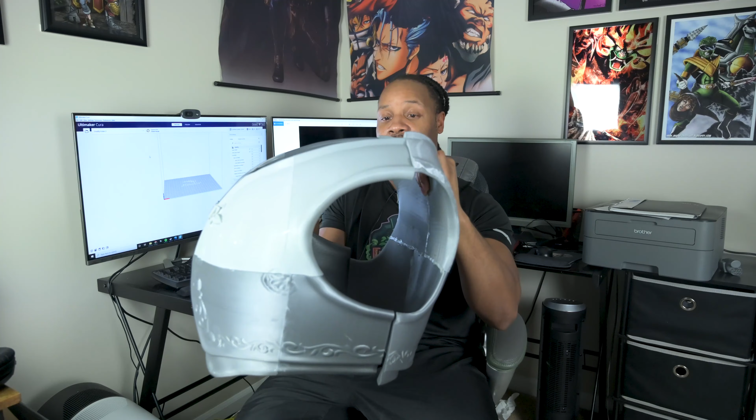The problem I experienced was the front fit, the back fit, but the front and the back do not fit together. Not sure if you can see it here, but a few of the sides just will not line up. So maybe the top two will line up and the back two will not line up, no matter what I do. That was really discouraging.

It took, I don't remember how many days, 8 days or so, or like 6 days or so for all of this to print out. All of the filament is now wasted, but nonetheless it was a great learning experience, and moving forward I will not make this mistake again.

After I made this mistake, I was frustrated, and for a few days I was like, what the hell, man, what could I have done to prevent this? So I finally learned what I need to do to prevent this.

So let me jump over to Cura and show you guys. All right, here we are in Ultimaker Cura. I use Prusa Slicer and Ultimaker Cura simply because Prusa Slicer can cut, do not get that confused with slice. I have an easy time cutting files in Prusa Slicer, whereas in Ultimaker Cura I do not have an easy time cutting files. I'll make a whole video on that later, but just know Prusa Slicer for cutting, Ultimaker Cura not so easy for cutting, at least for me.

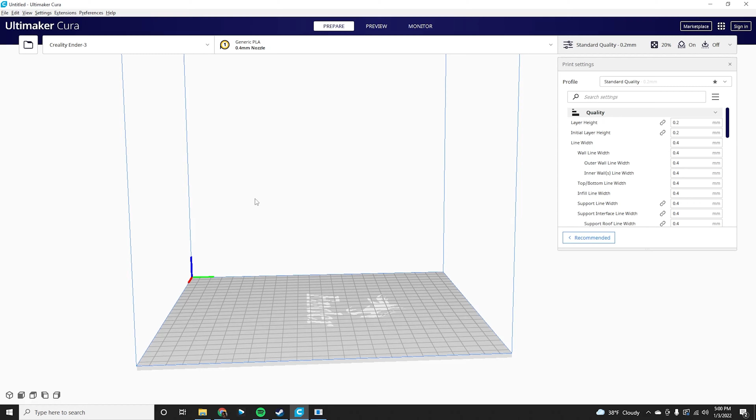Anyways, we're here in Ultimaker Cura. You guys go ahead and open it up. I'm not going to go over settings. I have mine set for my Ender 3, but I also have a CR10 here and an Ender 3 Pro profile. I'm not going over that. So let's go ahead and load in our part.

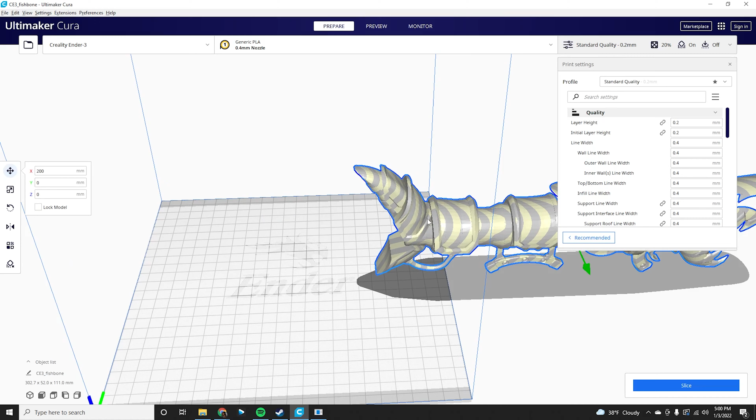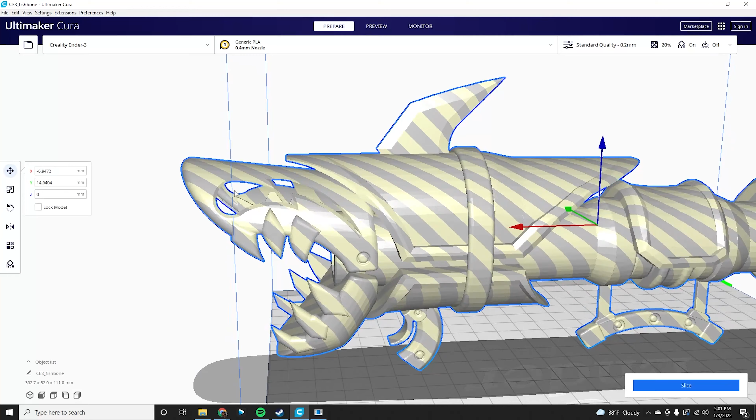I'm just going to drag and drop it. I'm going to use Jinx's gun, Fishbone, well, her rocket, and boom, here we have it. Let's drag it over here, close this off. If I can, okay, there we go. So we're not talking about scaling it or anything like that right now. We're just literally talking about making the model all combined, what you need. As you can see with Fishbone here, the eyes, let's zoom in, are missing from this model. There are no eyes built into this model.

I was like, maybe I can get the eyes, which were included in the file. So let me go ahead and drag those into the file here. I think they're underneath, there they are. So I just drag and drop, that's all I did for these. Let's go ahead and move them over to the plate. We have one eye, we have the eye detail, we have another eye detail, and we have another eye. So as you can see, we have two eye pieces, two eye details here.

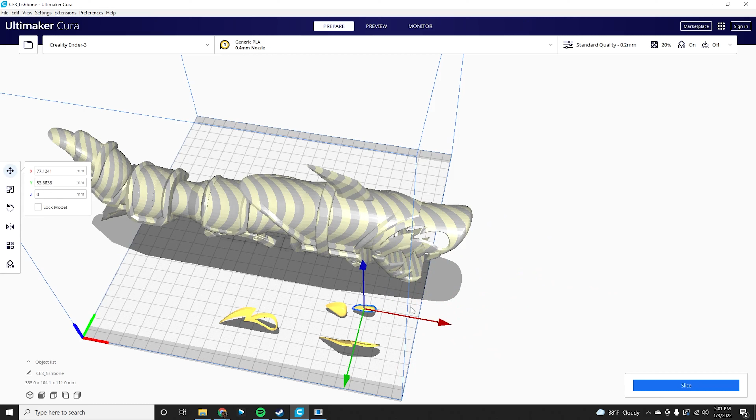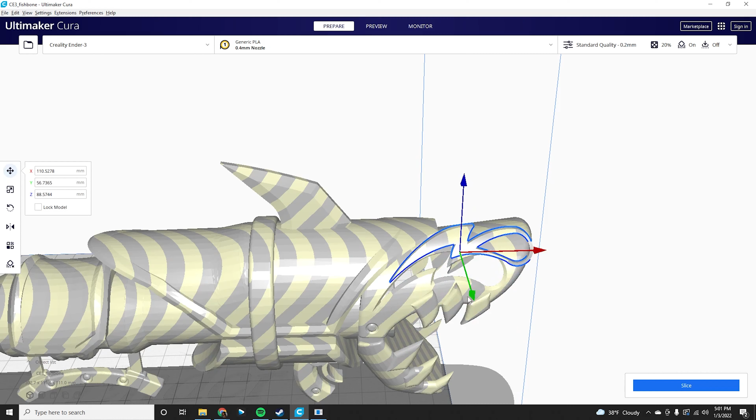What you need to do, instead of trying to line these up, it's almost impossible. First is snapping to the bed, you're going to have to try to drag, drop, match. You can use other programs to do this, but either way it's kind of going to be a pain to simply match this to the actual model. You can get close, you're going to have to move it around at angles, whatever have you, but you're never going to get it exactly where it needs to be.

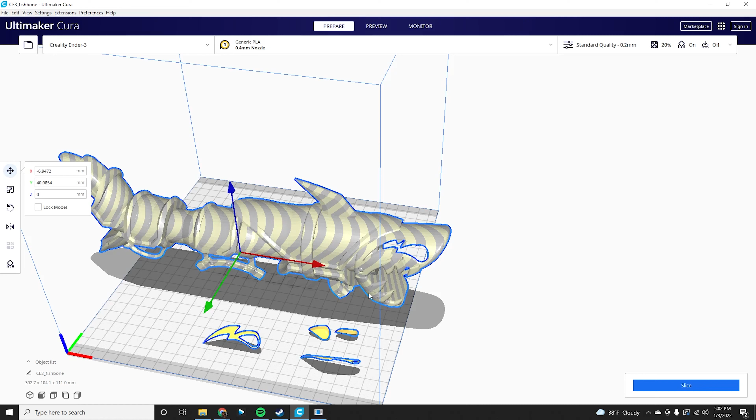So let's go ahead and place that back. What you're going to have to do instead is grab the first model, hold down Shift, select every single thing that you want to combine. Now, if the model was created in such a way that these pieces were basically a part of it before, you can go ahead and reattach them by right-clicking and literally hitting merge models.

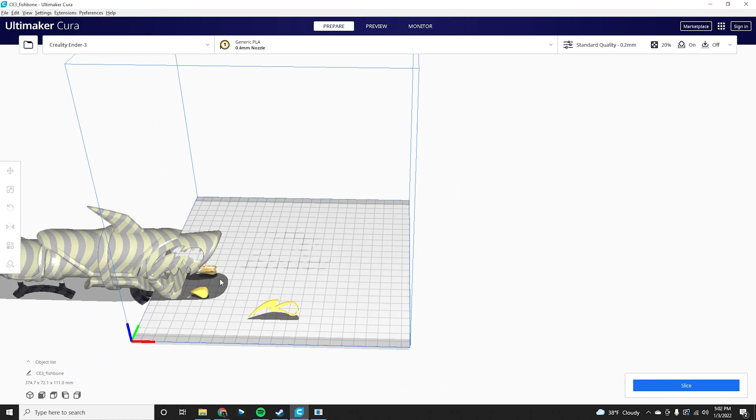Pull this back over here, you'll see now the eye and the eye detail are snapped into the rocket. I'll undo that and put everything back. Hold shift, click everything you want on the model, right click, merge models. That's how we combine all the files into one. Now you're not worrying about sizing or anything like that—it's all part of the model and you're good to go.

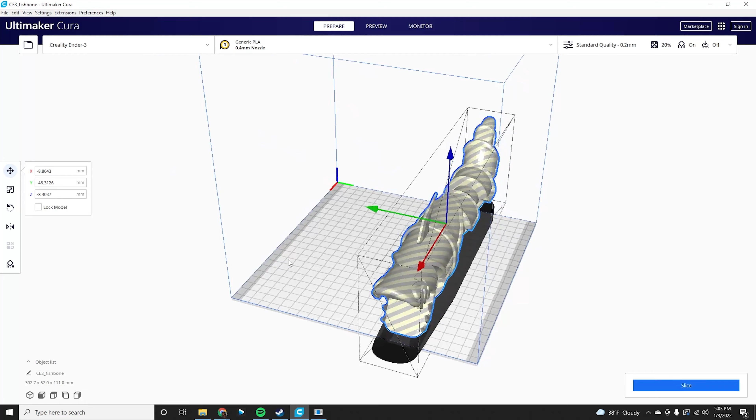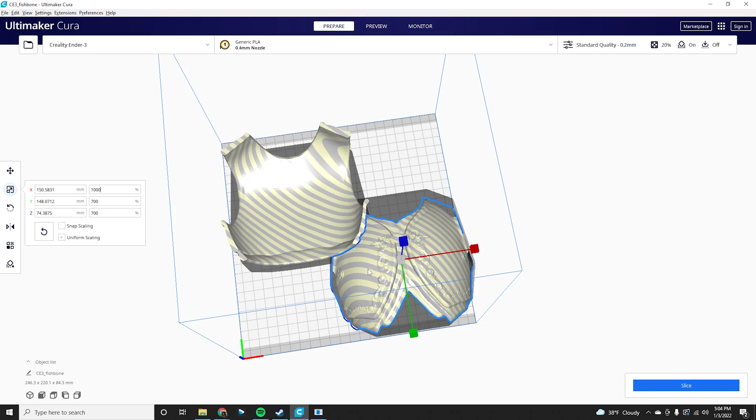Boom, it applies to everything. The chest is now scaled to 1000 times what it was. Same goes for this piece over here, 1000 times. So ideally these two pieces should go together now. Let's go to move.

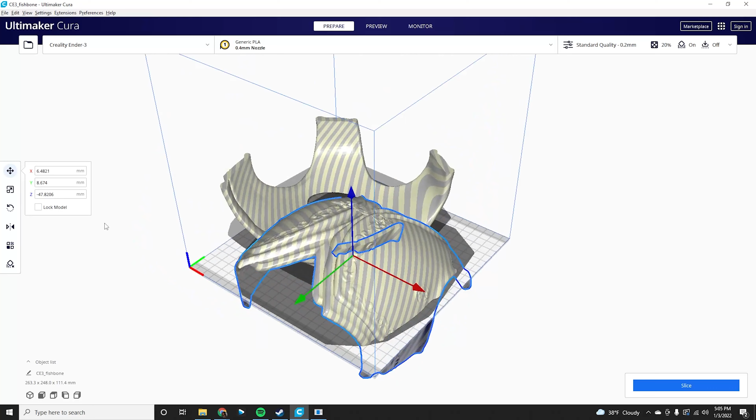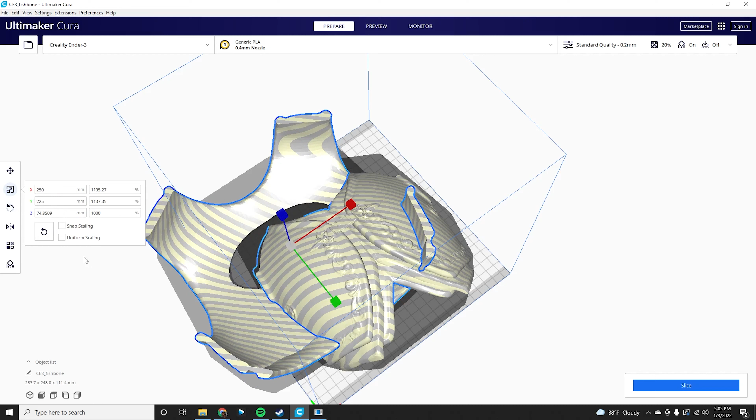These two pieces should go together, and they may. But if you're like me, these pieces are just not going to automatically fit right from the file. You're gonna have to change each axis individually—the X, the Y, and the Z. So unclick uniform scaling, and let's say we make the X 250, the Y 225, and the Z 100. Now this chest piece is very different than what it was—you can see all the scaling here is completely different.

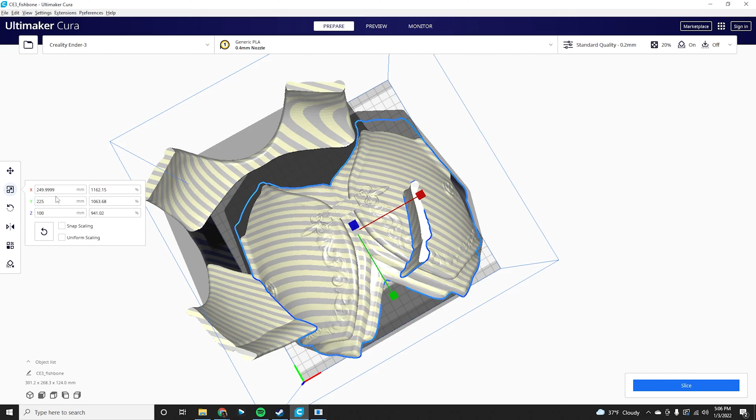You'd think we'd just go over to the chest piece, type in the exact same measurements—250, 225, and 100—and all of this would match up. It will not. Let me tell you right now, they will not match up. Do not try to match your armor this way. This is what I did and it didn't work.

So if we really want to match these pieces, let's get rid of these and import in the originals. Here we have our two pieces again—they're really small because who knows, they just come in that way. These are, by the way, Nikko Industries Lich Armor files. They're amazing, shout out to Nikko Industries, love them.

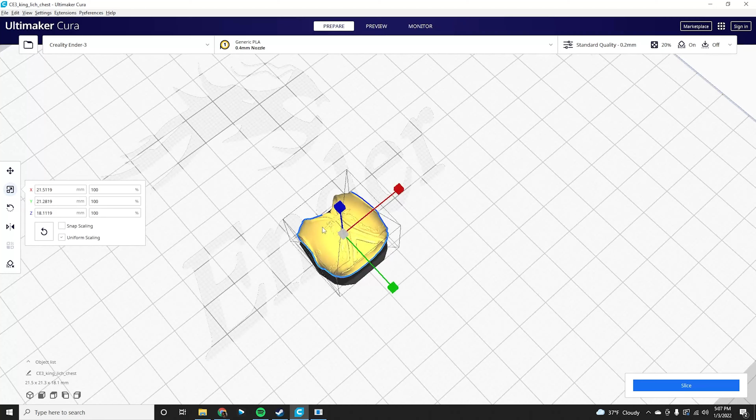So anyway, what we're gonna do is the same thing: hold down shift, click 1, click 2, right click, merge models. It may take a moment, but boom, there we have it—the two models are now merged. Let's go ahead and rotate that so you can see that they are in fact merged. Pops up on the plate. Now we can take the model, slice it, do whatever we want.

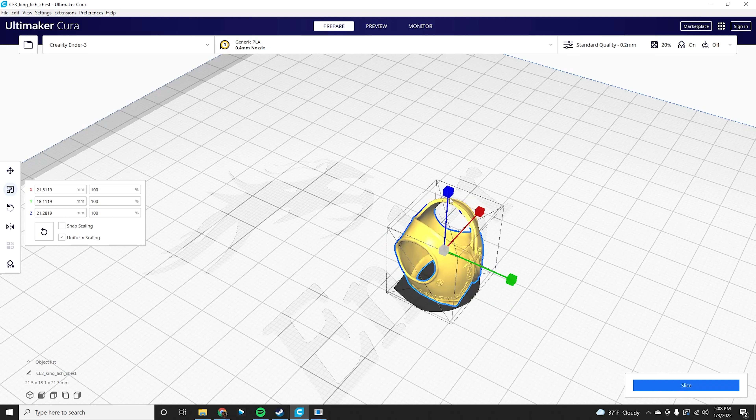So now we'll just go ahead and scale it to whatever number we want. Keep going, keep going, keep going—let's say we type in 700, boom. Now it's 700 times what it originally was.

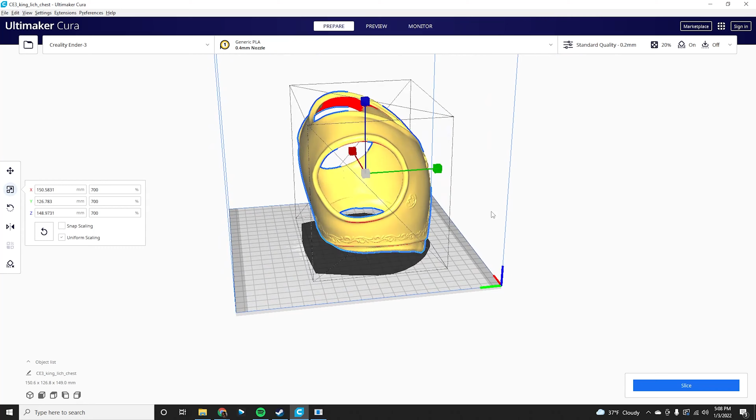Once we have it blown up like this, we can go ahead and cut it to whatever we want so that it will fit on our printers. Whatever printer you have—the CR10, Artillery, Prusa, whatever—you can now cut this into whatever size you want. Again, cutting is very different from slicing.

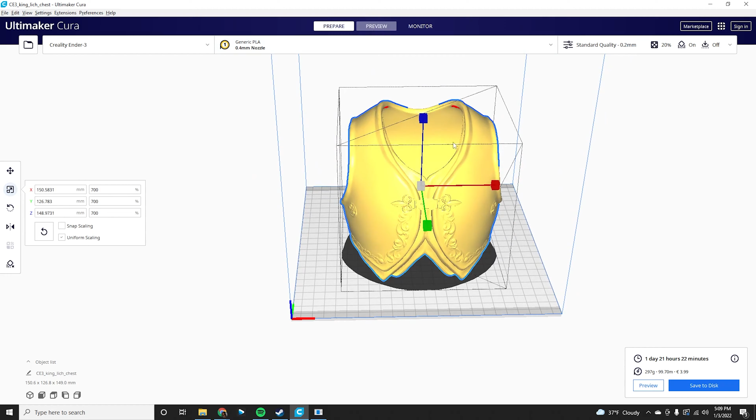If you see over here, if I press the slice button, it will do its thing—actually that's going to take a while, give it a second. All right, it's just finished slicing. As you can see, it tells us it'll take 1 day, 21 hours, and 22 minutes to print. We can preview it here, see what that would look like with all the supports and everything, and there we have it. Slicing, again, different from cutting, so don't get the two confused.

So there you have it—you can make sure this catastrophe never happens to you again. I'll probably just keep this as a constant reminder of where I've come from to where I'm going. I literally have the new pieces printing right now, and I went ahead and rescaled them and did all the work necessary to just get the reprint started.